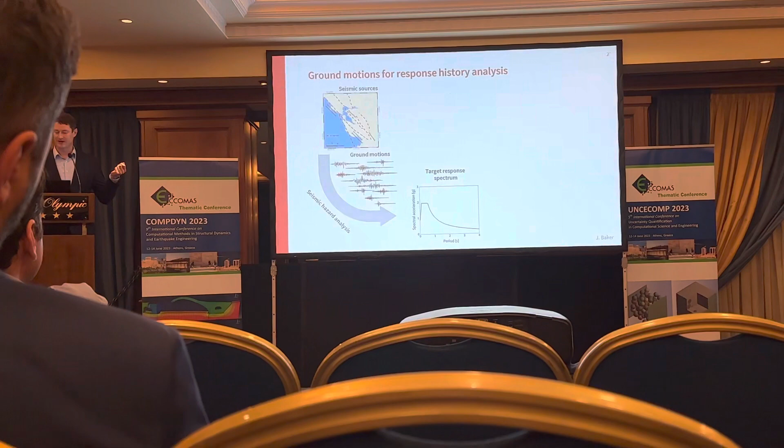So we start on the left-hand side here with a seismic hazard analysis. We need a characterization of nearby seismic sources and the potential sizes and locations of earthquakes that they could produce, described probabilistically. Then we make probabilistic predictions about the ground motions that could result at our site, given each of those potential earthquake ruptures. And we integrate that all up in a probabilistic seismic hazard analysis. And one of the outputs from that analysis is a response spectrum. And this is typically associated with some kind of rare level of ground shaking that we would predict at our site. And then that response spectrum is then utilized heading into our computational dynamics problem.

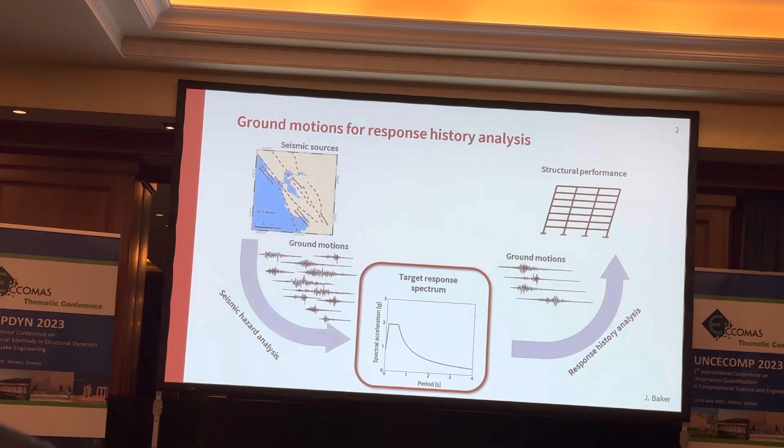We'll take that response spectrum, we'll find some ground motions that are compatible with that response spectrum, either recordings or simulations. Those are then inputs for numerical modeling of the structural performance. And here I'm thinking about detailed analysis, right? If we're doing all of this hazard analysis, it's probably a relatively involved project. And I'm thinking about the context where that structural performance is assessed with a nonlinear dynamics model. So we've got deterioration mechanisms and kind of some complex relationships between those input ground motions and the response of the structure.

Okay? And what I want to dig in today on is this middle piece here, this target response spectrum. So that's really an important link between what the earth scientists are doing to tell us about potential seismic hazards and what we as engineers are doing to infer the structural performance associated with that. And as I'll foreshadow a little bit, the way we specify that response spectrum can have really big impacts on the way that we make inferences about the performance of the structure.

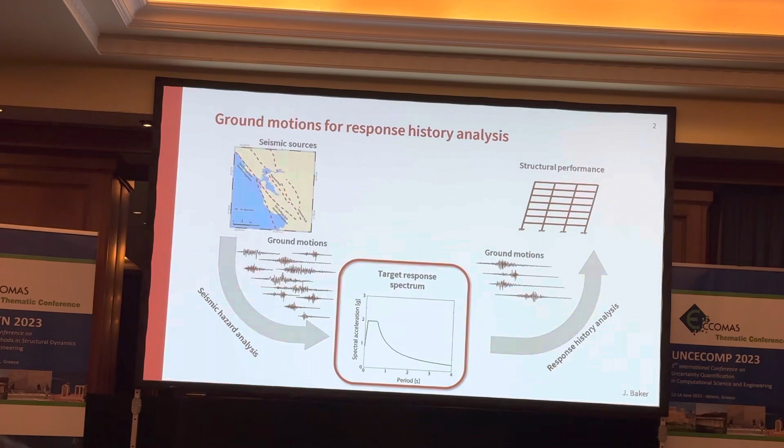Okay, so what I want to do then is I kind of have two parts to the presentation. For the first half or so of the presentation, I want to just give a little background or kind of broad explanation about characterizing response spectra. And I'm going to talk about the conditional mean spectrum in particular, and just give a little bit of explanation about what this concept is as a target response spectrum.

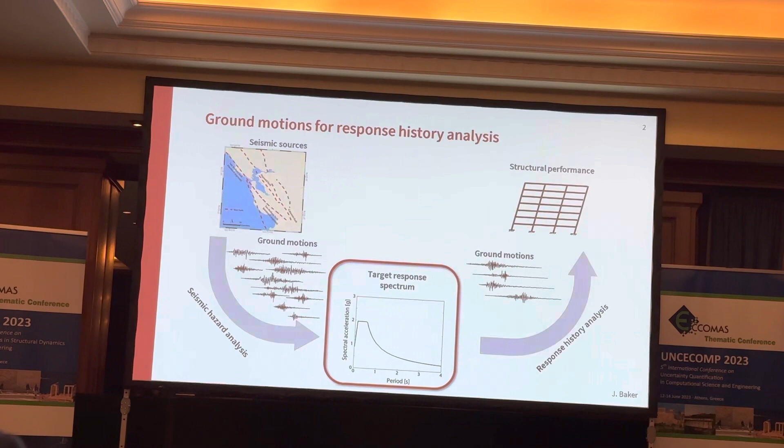And then in the second half of the presentation, I want to talk a bit about what can we do with those insights in terms of specifying response spectra in building codes and other regulations, and how do we kind of formalize this process so that it can be used in structural assessment. I'll talk a little bit about some of my experiences, as well as what the US building codes are doing now in this regard, and a little bit of study we've been doing recently to evaluate if the current code provisions are appropriate in terms of meeting the goals that we have out of this assessment procedure. Okay, so let's get started with that.

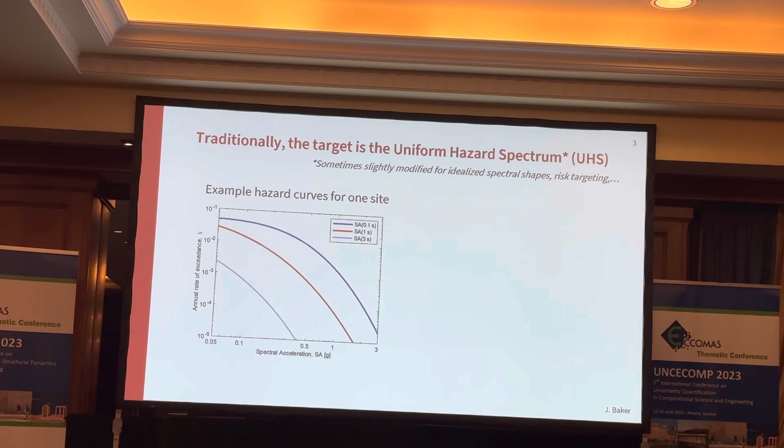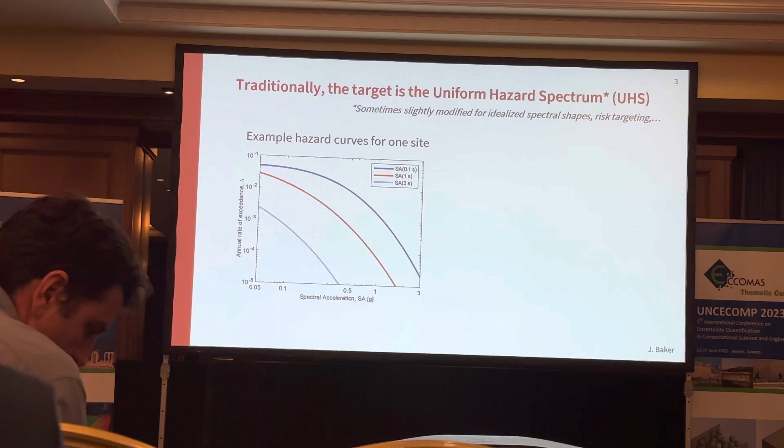So traditionally, that middle target response spectrum has been a uniform hazard spectrum, and I'll put a little asterisk there that sometimes we make some modifications. We've got an idealized code shape, like a multilinear shape. And some places we use these risk-targeted spectra that are a little bit of a modified uniform hazard spectrum. But I think conceptually, if we think about a uniform hazard spectrum, that's really pretty close to the basis for a lot of the response spectra that we use in, particularly in kind of the building assessment practice and building code context and things like that. And just to make sure we're all on the same page, this uniform hazard spectrum, what we do is we do that seismic hazard analysis I pointed to on the previous page.

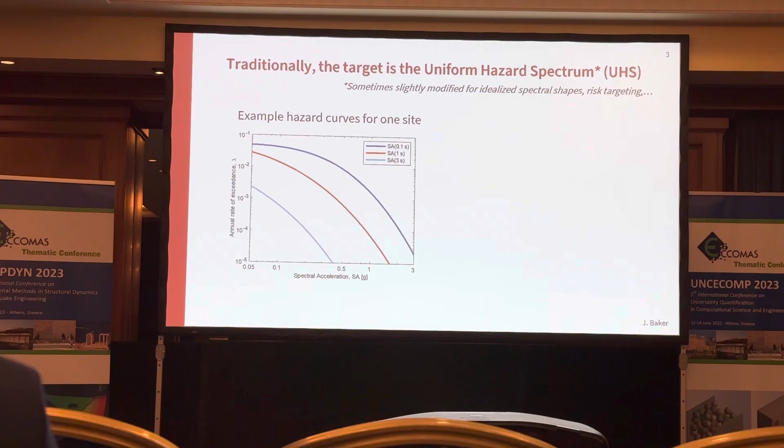And so what I've got here plotted are ground motion hazard curves for an example site. We've got three curves here, plotting spectral acceleration versus the annual rate of exceedance. Over on the left, we've got the low amplitude ground motions that are exceeded frequently with high rates. And as you move to the right, this is higher and higher amplitudes. The three curves are three metrics of ground motion intensity, ranging from short periods to longer periods. And so for each spectral acceleration period, we've got a different ground motion hazard curve.

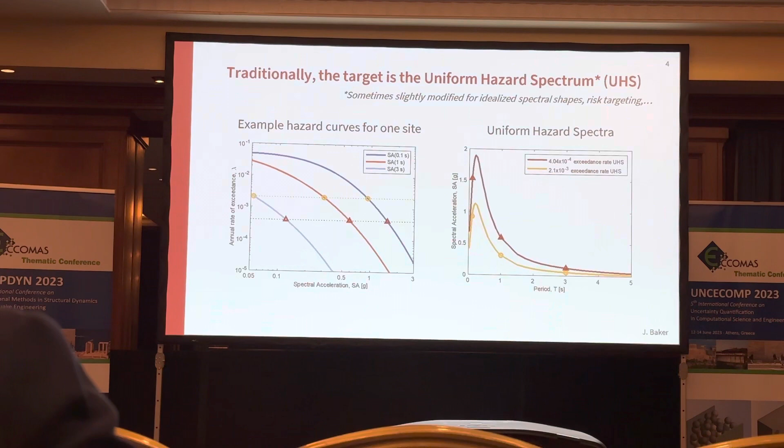And to build a uniform hazard spectrum, we just pick an annual exceedance rate off the vertical axis. We go pull the amplitudes of the spectral accelerations from those different curves. And then on the right-hand side, we just draw those points together. So we've got the spectral acceleration period plotted on the horizontal axis, and the spectral acceleration itself plotted on the vertical axis. So I've got it plotted there for 2 return periods.

And you can take the 3 points off the left plots, get some points from other periods, and fill it all in, right? And so sometimes we use the spectrum directly, sometimes we draw some lines through it and idealize it, and use that to represent the ground shaking hazard, okay? And so that's been a basis for many of our codes around the world and many of our different evaluation procedures.

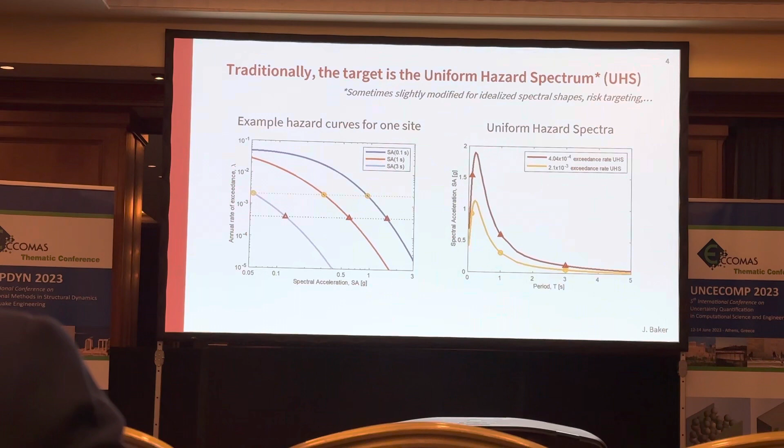The challenge here, though, is that response spectrum is not the response spectrum of any one ground motion, right? It's a collection of points from a collection of independent analyses, and we've plotted them all together because it's a very convenient way to summarize a lot of information. You know, each point on those uniform hazard spectra has the same rate of exceedance, so we've got some sort of equivalence from point to point, but it's not the spectrum of any one ground motion, right? It's just an aggregation of a lot of analyses. And so that'll be important here coming up.

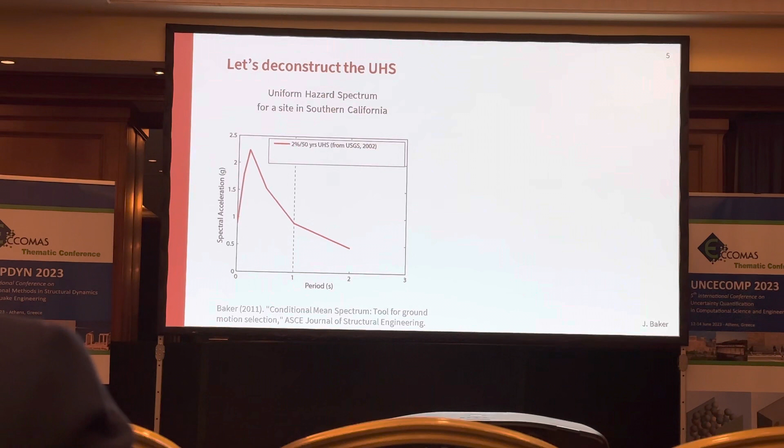So let's deconstruct that uniform hazard spectrum a little bit here. I've got a uniform hazard spectrum pulled for a site in Southern California near Los Angeles. So this is a highly seismically active part of the world, and a part of the world where I work a lot. So it's useful for illustrating a few points. So we can pull this uniform hazard spectrum. I took this from the US Geological Survey, which is the US agency that produces this data for most of our engineering work in the US.

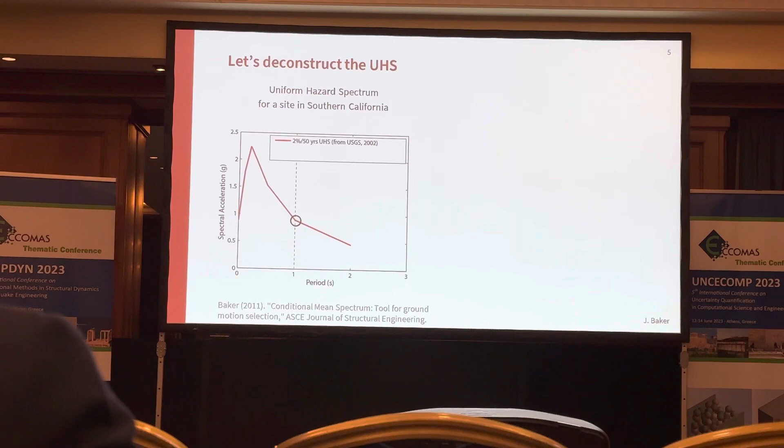And let's say that I was interested in a structure that has a period of 1 second. So I'm interested in ground motion amplitudes at about 1 second. And for this particular site, this is a 2% in 50 years probability of exceedance hazard curve, and the amplitude's about 0.9 G. So I might be interested in 0.9 G spectral accelerations at 1 second as a loading condition for my assessment. And we can do a ground motion disaggregation.

Some of you might know these things. If not, what it is, this is a conditional distribution of the earthquake sources that contributed to that 0.9 G spectral acceleration at 1 second. This is kind of a standard product out of hazard analyses. And so the horizontal axes here are magnitudes and distances of earthquakes, and then the heights of the bars are the percent contribution from those types of earthquakes to this ground motion at this particular site.

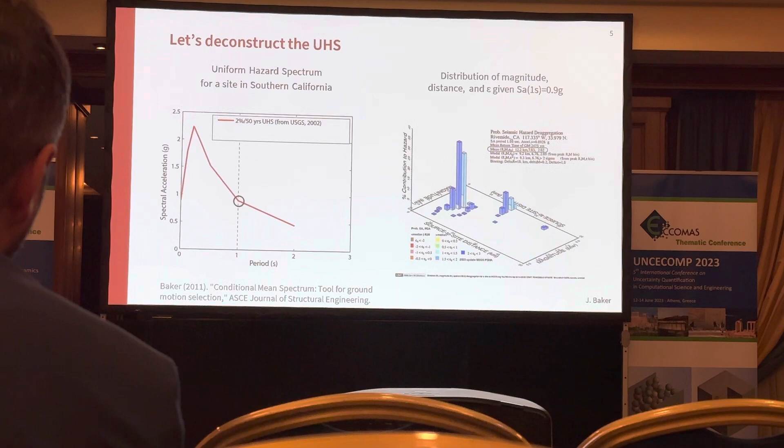So you see this big spike kind of off to the left of the figure, and those are magnitude 7 earthquakes about 10 kilometers away from the site. There's a big active source there, about 10 kilometers away, that produces earthquakes every 200 years or so, and so it's contributing a lot to hazard at this site. So magnitude 7, I think to be more precise, it's 12 kilometers away. So let's keep those numbers in mind because I'll use that for an example for the next few slides.

So if I take a magnitude 7 earthquake 12 kilometers away, we have these ground motion models that make predictions of ground motion amplitudes. If I just go predict the median amplitude from one of these models, I get this black line here, which is much lower than the uniform hazard spectrum. At that 1 second period, it's only about 0.3 G. So we've got this big gap between what a magnitude 7 earthquake 12 kilometers away produces on average and what this response spectrum is. And what's the extra ingredient here that closes that gap is what we term epsilon.

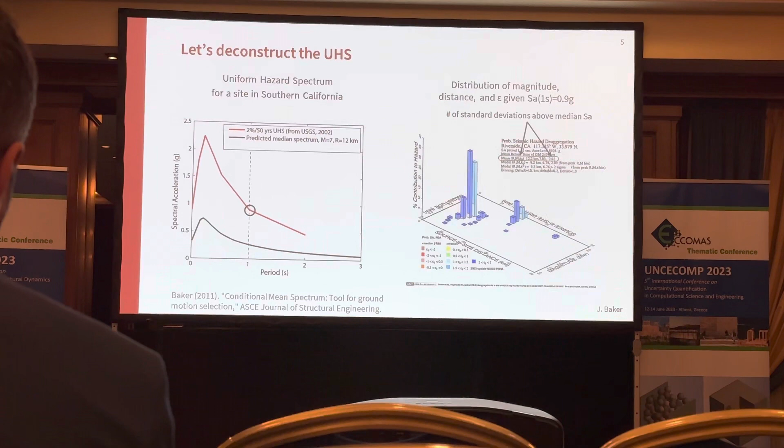So this is kind of the residual between a particular earthquake's ground motion intensity and its median prediction, right? So the ground motions are highly variable. Some are much bigger than the median, some are much smaller. And in this case, for this uniform hazard spectrum, the conditional epsilon is 2, saying we're expecting a 2 standard deviation larger than median ground motion. And indeed, if I plot a median plus 2 standard deviations prediction from a ground motion model, we're back to around that uniform hazard spectrum.

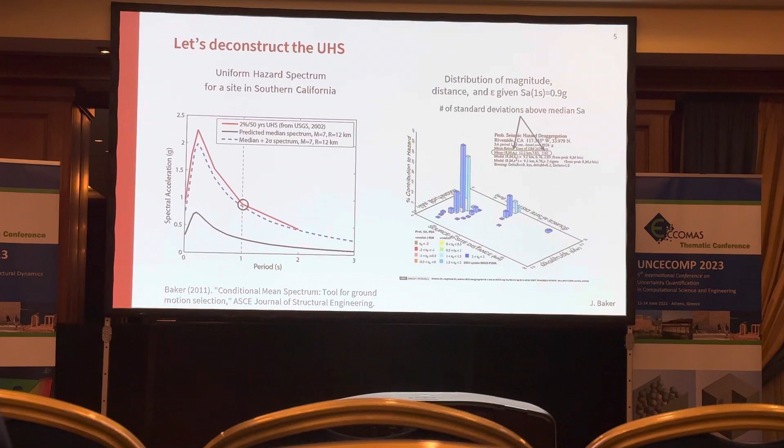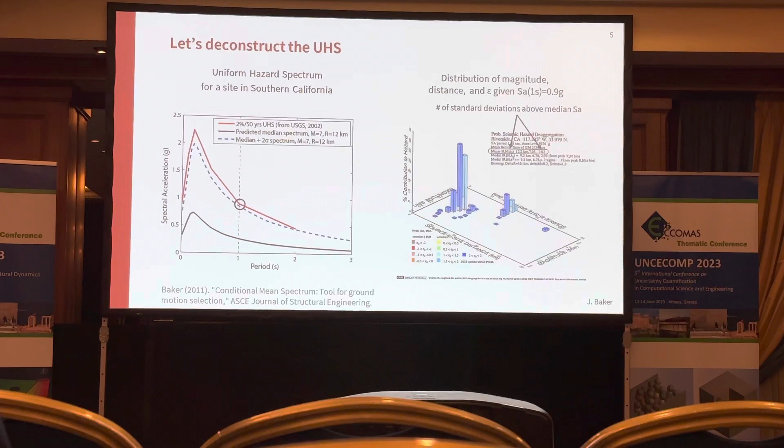So this is an important concept that in a lot of seismically active parts of the world, when we're designing for rare ground motions, like a 2% probability of exceedance in 50 years, that's something that occurs once every 2,475 years, 2,500 years. But I mentioned this earthquake source produces magnitude 7 earthquakes every 200 years. So there's this discrepancy between this 2,500 year return period that I'm targeting and the return period of the earthquake, which means that I'm usually designing for stronger than median ground motions in those conditions. And so this big difference between median amplitudes and these design amplitudes is appropriate because I'm trying to design for this rare condition, and so that's naturally associated with a stronger than average ground motion amplitude.

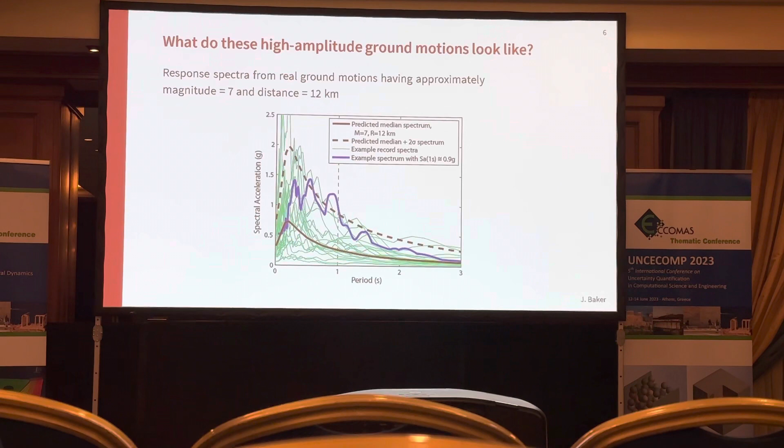Okay, let's look at some real ground motions. So here I've got the median spectrum in black here, the median plus 2 standard deviation spectrum in dashed black, so the same lines as the previous slide. And then in green are plotted the response spectra of real recorded ground motions that had about a magnitude 7 and were recorded about 12 kilometers from the site. So just collect up observational data, and they're relatively consistent with the predictive model, which is natural because the predictive model is based on observations. So about half the ground motions are above the median spectrum, about half are below. And on occasion, we make ground motions with these response spectra way up 2 standard deviations up, right? So there's, I think, 20 ground motions plotted there. So we would expect about 1 out of 20 to be 2 standard deviations larger than the median, and indeed we see that. And in fact, in blue, I've got 1 ground motion highlighted.

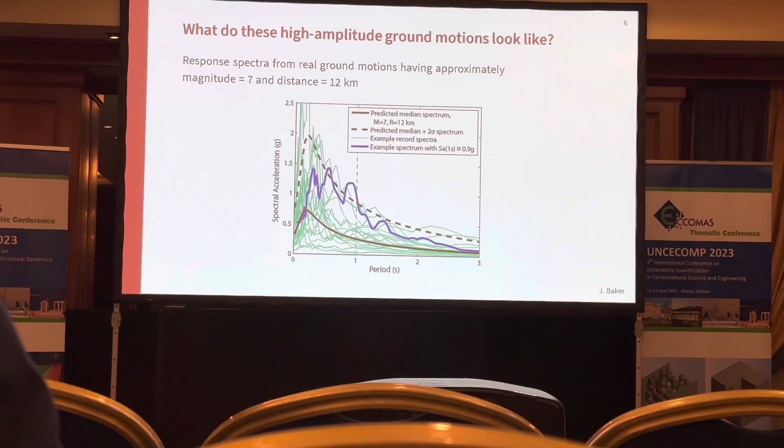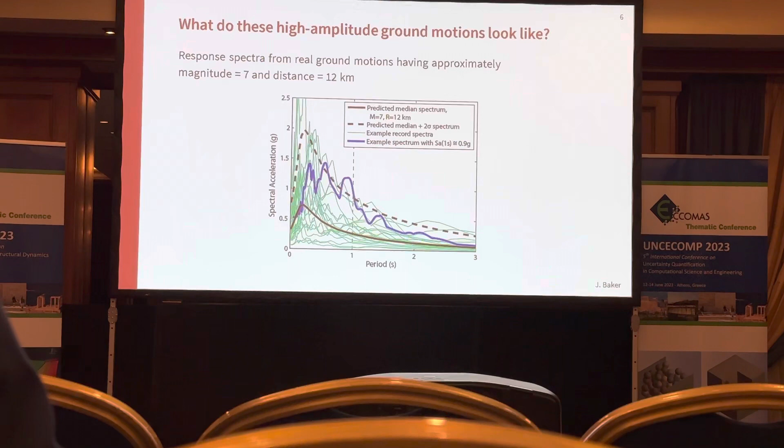So this is the response spectrum of our magic ground motion that we want, right? This was a ground motion from a magnitude 7 earthquake, about 12 kilometers away from the rupture, and it has a 0.9 G amplitude at 1 second, which was that condition that I started with, right? And so it's strong enough at 1 second to be matching this design spectrum. But at other periods, it's not necessarily up at 2 standard deviations, right? So these residuals in the amplitudes are not perfectly correlated from period to period. So if you look out at 2 or 3 seconds in this response spectrum, that blue spectrum is much lower than the 2 standard deviations. And similarly, over at shorter periods, it's much lower, right? And so back to my point that the uniform hazard spectrum, which is kind of like this black dashed line, that's not the spectrum of any one ground motion. And we see from these green motions that some ground motions are up at that high amplitude, but they're not up at that high amplitude at all periods in any one ground motion. And so I want to think about how we could recognize that in our design procedures.

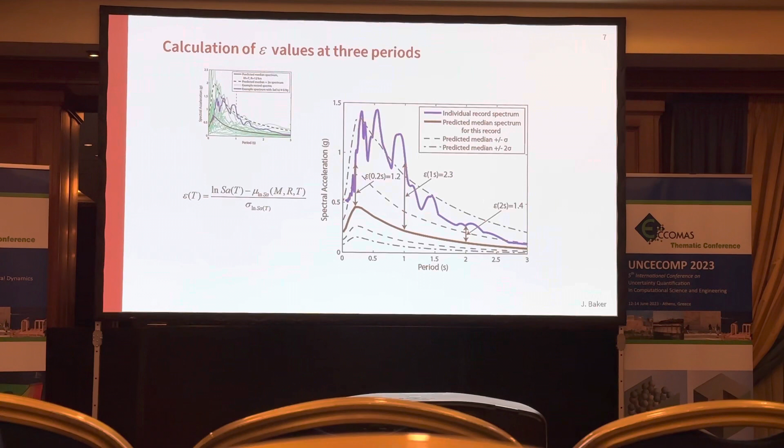So what we do is we can think about these epsilons, these residuals between the median prediction and what we actually observed. And so that's computed. There's a formula here, I won't dwell on it, other than to say it's just the difference between observations and median predictions in terms of number of standard deviations. And these amplitudes are log-normally distributed, so we do everything in log space. We just take logarithms, and then the response spectrum is effectively like a Gaussian process. So we can do nice statistics on that. But I'll plot things in linear scale just for interpretability. So we can compute these epsilons for this particular ground motion relative to its prediction model. So at the period of 1 second, this ground motion had an epsilon of 2.3, not exactly the 2 that I wanted, but close enough for illustration. And you can compute those epsilons at other periods as well, out at a longer period and a shorter period. So this is 1 ground motion. If we do these same epsilon calculations for several hundred ground motions, I'll plot those here.

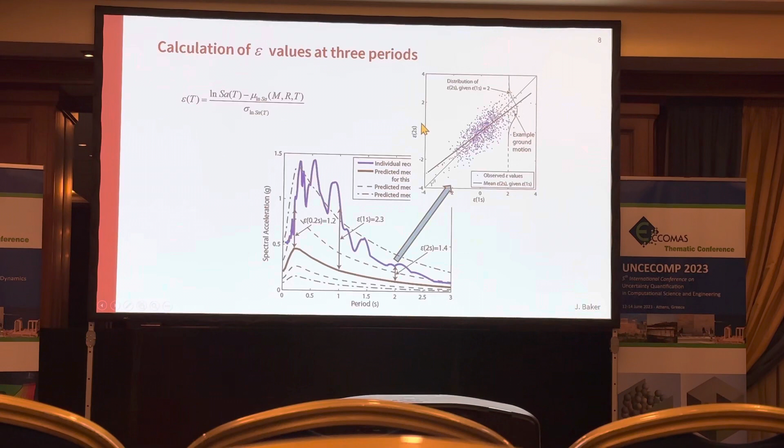So this scatter plot up on the right is a plot of epsilons at 1 second versus epsilons at 2 seconds. And so our particular ground motion we're looking at is out here at 2.3 for epsilon at 1 second and 1.4 for epsilon at 2 seconds. We've got lots of other points, some of them are positive and some of them are negative. And so you can see the scatter plot there.

And so that means we get nice formulas like, given an epsilon at 1 second of 2, the mean epsilon at 2 seconds is going to just be the correlation between these epsilons, which is 0.75 in this case, times the conditioning epsilon at 1 second. And you can get a conditional standard deviation as well. This is just multivariate normal formulas.

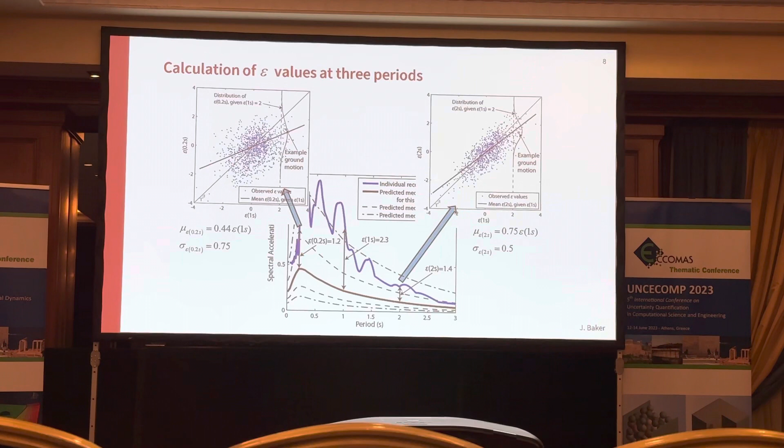Over at 0.2 seconds, the correlation between the 1 second and 0.2 second residuals is smaller. It's only 0.44. So the conditional mean is smaller in that case, and the conditional standard deviation is a bit bigger. All right, so we can repeat that calculation over all pairs of periods, and then we can fill in what we call the conditional mean spectrum.

So we're going to take that magnitude 7, 12 kilometer condition that we started with from our hazard analysis. We're also going to take the epsilon at 1 second of 2 that got us to that 0.9 g amplitude that came out of our initial hazard analysis. But then at all the other periods, rather than draw together this uniform hazard spectrum, we'll take the conditional mean values of the epsilons at those periods.

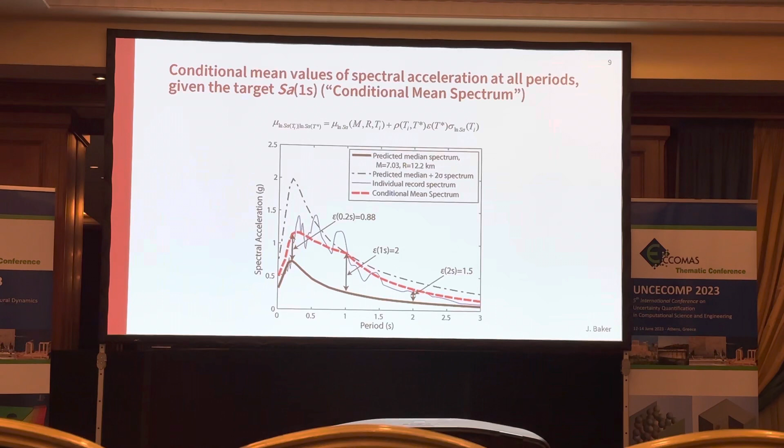So out at 2 seconds, we saw that the conditional mean epsilon was 0.75 times the conditioning epsilon, so 1.5, and over at 0.2 seconds, we've got a smaller number. So you can draw those points in over all these other periods, and that's this dashed red line. And we call it the conditional mean spectrum because we've conditioned on that spectral acceleration amplitude at a conditioning period, conditioned on the rupture characteristics that drove that, and we fill in the conditional mean at the other periods.

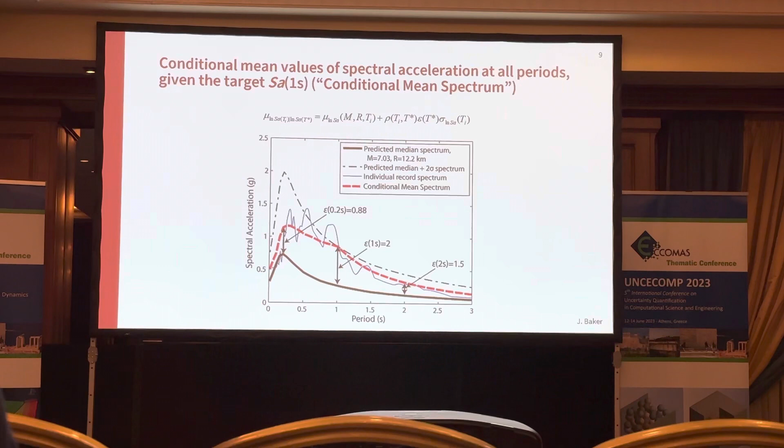And this is now plausibly observable in a single ground motion because we've carried these statistics through. And just anecdotally, that blue response spectrum is still sitting there, and you can see it kind of tracks next to that conditional mean value, giving us some sort of ad hoc observation that we see some consistency here.

We can also draw conditional standard deviations at these other periods. So we have no uncertainty at the 1 second spectral acceleration because we conditioned on that value. At the other periods, I've got plus or minus 1 standard deviation bounds drawn, to reflect the uncertainty at these other periods we didn't condition on. And that just comes out of those multivariate normal statistics that I showed earlier.

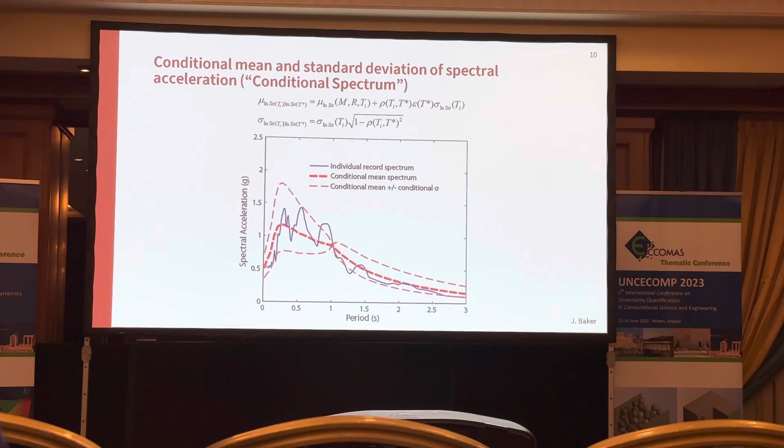All right, and we can call that a conditional spectrum. It doesn't have just a mean value anymore. You can represent a full distribution. Okay, so with these targets, you can go then select ground motions. So we'll build that target spectrum, and then go find ground motions consistent with that target spectrum, either the mean or the full distribution. And that'll represent realistic loading conditions for your site.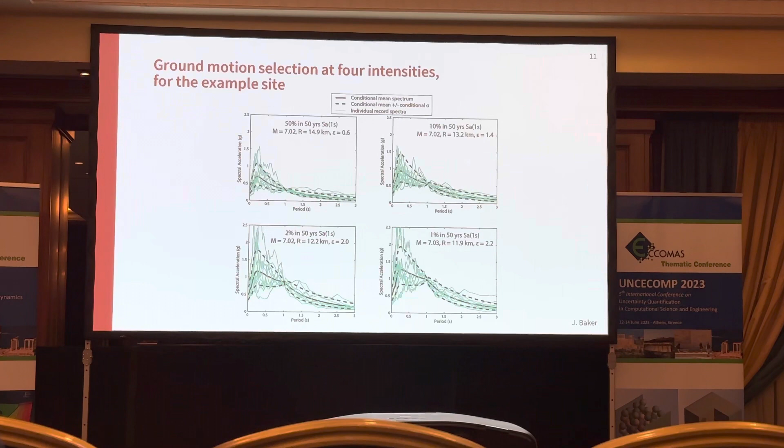And so the shape of the spectrum varies with amplitude. The shape of the spectrum is also going to vary from location to location, representing differences in the seismic characteristics at the location of interest. So we have this site-specific, amplitude-specific ground motion selection. But if we really want to, we can carry through all these. Actually, let me say one more thing before I get to that thought.

So there's a little bit of extra work and a little bit of extra thought to think through this, but it makes a big difference in terms of our assessments. So here's just a taste of what we might see.

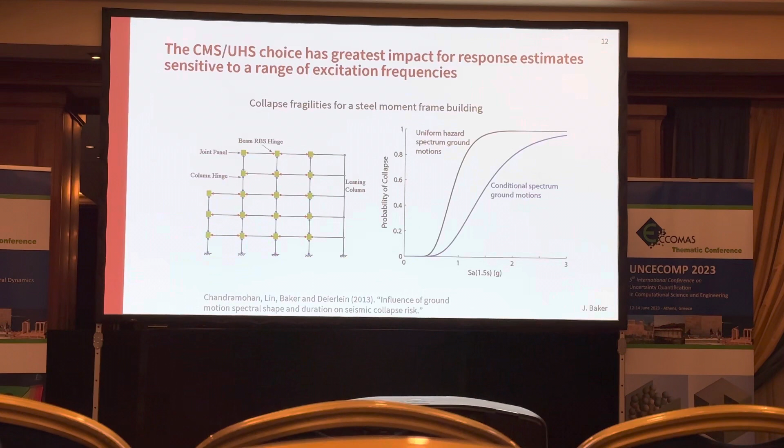So this is a steel frame building that we analyzed for another project with some colleagues. And this is a nonlinear dynamic model. We've got these lumped plasticity beam column connections that have all sorts of cyclic and within cycle deterioration, negative stiffness representing kind of buckling in the connections and all of this. And we model this building using ground motions like the previous slide, all the way out to collapse.

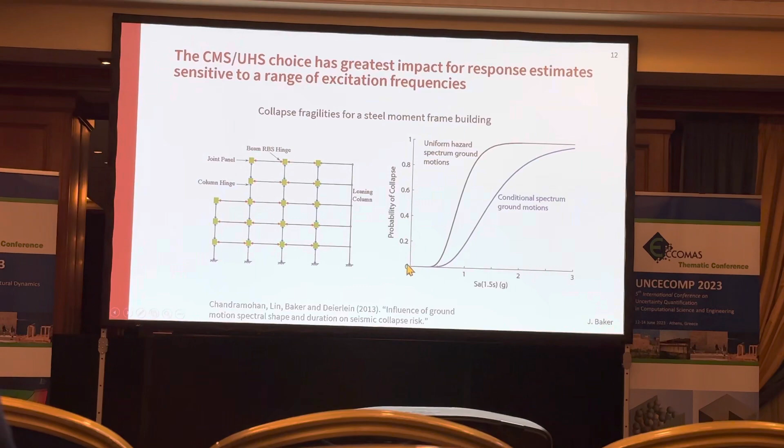So this is a plot over on the right of ground motion amplitudes at 1.5 second spectral accelerations versus probabilities of collapse that we get out of the repeated analyses. We did the whole process once with uniform hazard spectrum ground motions, and that's shown in black, and then once with conditional spectrum ground motions, like from the previous slide, shown in blue.

And maybe to give you a little bit of intuition, if I back up, we're effectively using the red spectrum or the dashed black spectrum as our 2 spectral targets for the ground motion selection. And because this is a building we're modeling all the way out to collapse, we need to get to kind of high amplitudes at elastic modal periods in order to really get the building excited. But then as it's deteriorating and softening and losing stiffness, its effective period is shifting out to much longer periods. And at these longer periods, there's a big difference in the amplitudes between the uniform hazard spectrum motions, which are not really the spectrum of any one motion, versus the conditional mean spectrum motions, which more realistically represent what we can see in one ground motion.

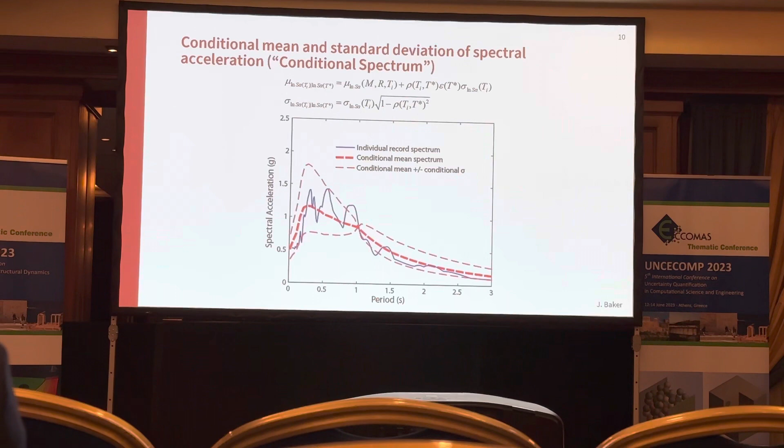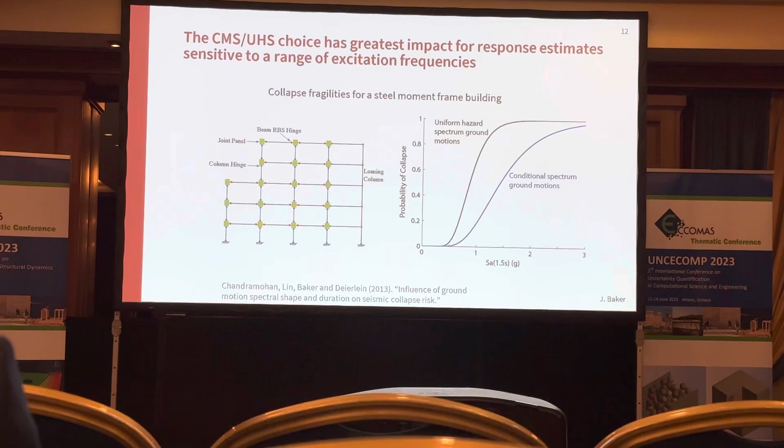And so because of that difference in amplitude, we see lower probabilities of collapse from the conditional spectrum ground motions, which we think are more accurate. And just to pick a point on this curve and try to bring it home, at a 1G spectral acceleration, the conditional spectrum predicts a 0.2 probability of collapse, and the uniform hazard spectrum ground motions predict a 0.8 probability of collapse. So really a massive difference, and that's as big of a difference as we ever see from modeling uncertainty in the buildings. You can really change building characteristics pretty substantially and not see differences this big. So the choice of loading is really important in these types of problems if we're trying to get at collapse reliability.

Okay, so this is kind of a full research style, do lots of ground motion selection, step through lots of different amplitudes. That's really not what happens in design practice, right? This is too resource intensive and too many analyses and too many ground motions to select. And so the other piece of this puzzle that we're thinking about is how to codify this and how to use this in a more simplified manner.

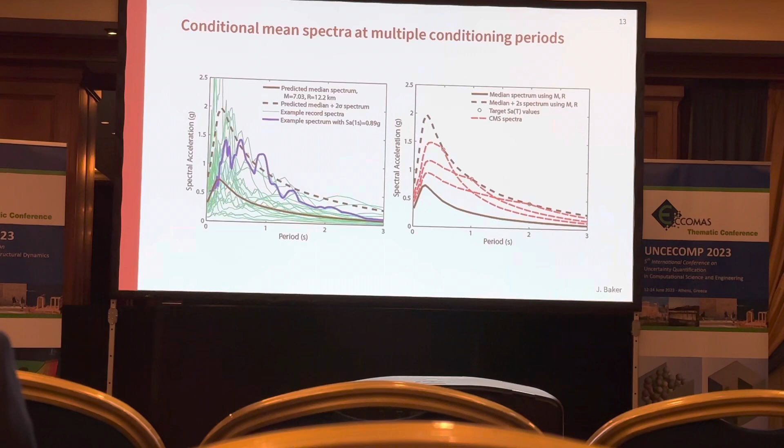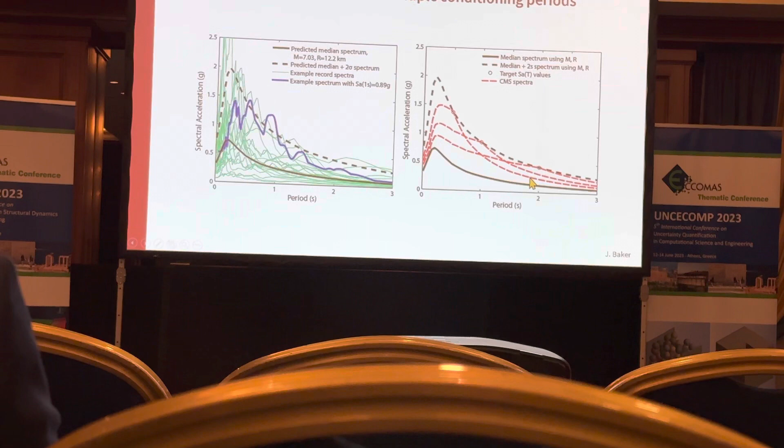And what's important there is usually in a code check, we're checking at 1 return period, 1 ground motion amplitude, and checking was our performance satisfactory or not, right? And so you might think about this, maybe coming over to the right figure, if this dashed black line was our uniform hazard spectrum, and we were trying to break it up into this conditional mean spectrum, the choice of the conditioning period is important here, right? So I might condition at an elastic modal period of my structure, but if the building softens through the analysis, I've got kind of lower intensity that I've loaded it with, but perhaps I want to condition out at the softened period and get the high amplitudes there and have lower amplitudes at shorter periods. So those are all plausible loading conditions.

And so the question is how to handle those multiple loading conditions, which I think is equivalent to having multiple conditioning periods. How do we handle that in a checking procedure when we don't know ahead of time what exactly the periods are that are critical for loading the structure, right? We're trying to explore that through the assessment. So one way to think about this conditional spectrum calculation and these conditioning periods, sorry, I fished around my slides a little bit this morning.

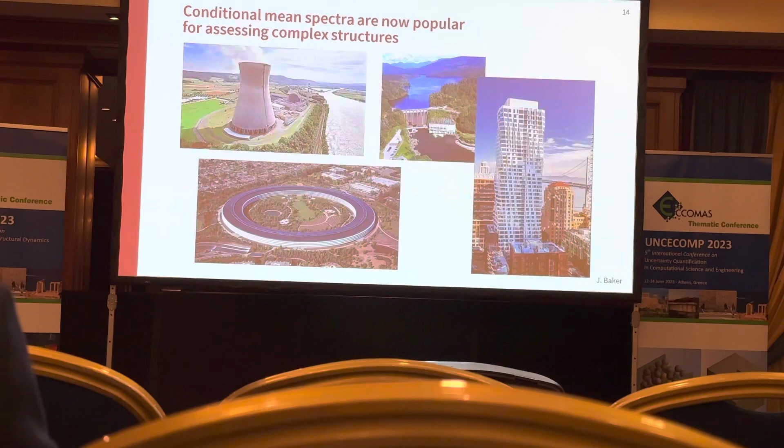And then high-rise buildings is really a popular case. Most of the high-rise buildings built in the western United States now use this conditional mean spectrum procedure because you get very low frequency modes for the first mode of the building, but then you have other types of response features that are sensitive to higher frequency excitation. So I'll think about the high-rise building case in particular, because that's a really common situation in the western US and other parts of the world. I know it's used as well.

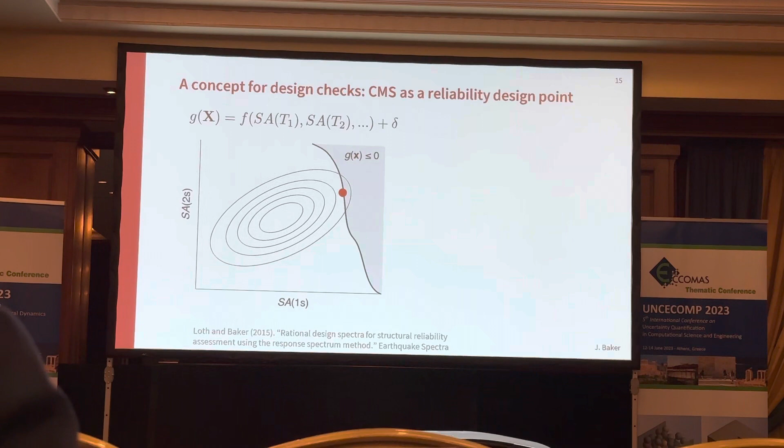And so this idea of these conditioning periods, one way to think about it is to think about a reliability analysis with a design point, right? And so the full-blown approach, selecting ground motions at multiple intensities and stepping through these fragility functions, I think about as sampling ground motions across an entire probability distribution of spectral accelerations at different periods. I'll plot in just 2 dimensions here, but it's a higher dimensional problem. And our structure is some sort of function of these spectral accelerations, plus a function of other characteristics that are not defined by spectral acceleration. Let's call that delta here in a limit state function.

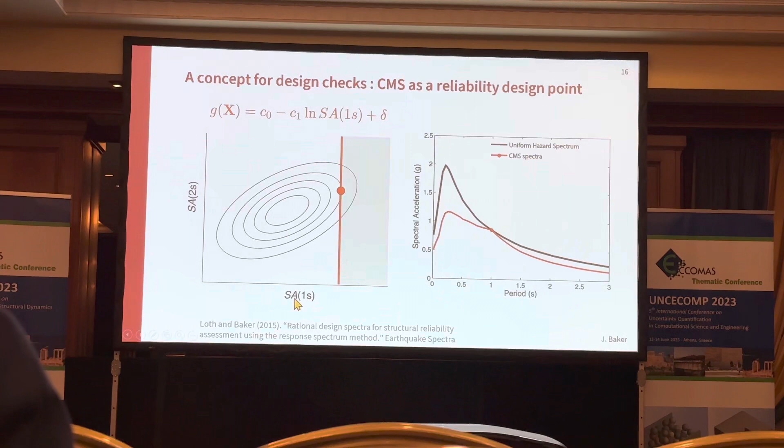Okay? And if we could step through this entire probability distribution with ground motions and check for failures and non-failures, we could find the probability of failure of the system and decide if that's acceptable. But in a checking procedure, we don't have the luxury of stepping through everywhere. So what we do is we just check at more simplified sets of loading conditions. One way to think about this is if this limit state function was really dominantly a function of one spectral acceleration period, then our limit state function would be vertical as a function of that one spectral acceleration period. Our design point would be the spectral acceleration with some probability of exceedance associated with our reliability goal. And then there's an adjustment to deal with this delta.

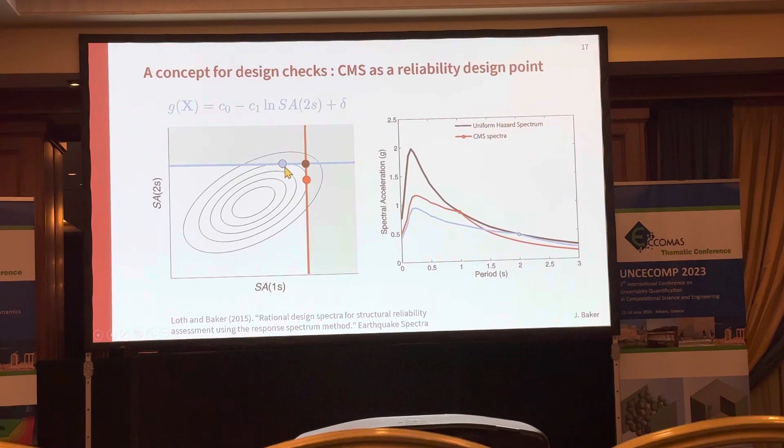So the spectral acceleration at 1 second, you could derive it through some reliability calculations. The spectral acceleration at 2 seconds, because it's not in the limit state function, the design point is going to be at the conditional mean value of 2 second spectral accelerations given this 1 second value. So that naturally falls out into a conditional mean spectrum at this 1 second condition. We don't know if that's actually the limit state function for our structure. Maybe our structure is a function of spectral acceleration at 2 seconds. And so we'd get a target 2 second spectral acceleration plus a conditional mean value at 1 second, and similarly for the other dimensions not plotted here.

And so you could think about these conditional mean spectra at different conditioning periods as design points. And then what we can do is we can do our check of our structure at those design points. And if we have adequate performance at those design points, we can infer that the limit state function is somewhere further out to the right and above. And we can infer that we've got acceptably low probabilities of failure. So those would be natural points to check at.

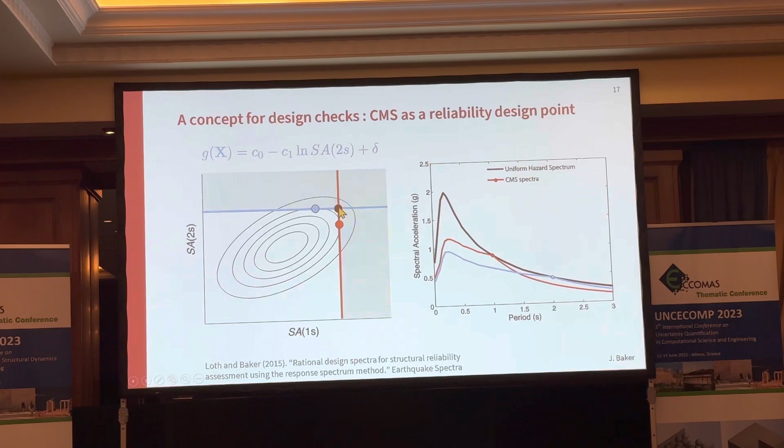The uniform hazard spectrum is represented by this black point, where we take marginal distributions of our individual spectral accelerations. We find some point out of those probability distributions, and then we just connect them together. But that's not necessarily an optimal place to be checking, especially in higher dimensions. You can really put that point out pretty far away from your probability distribution. So for those of you reliability oriented, that might be a concept that resonates here. We did some derivations to try to draw that connection a few years ago.

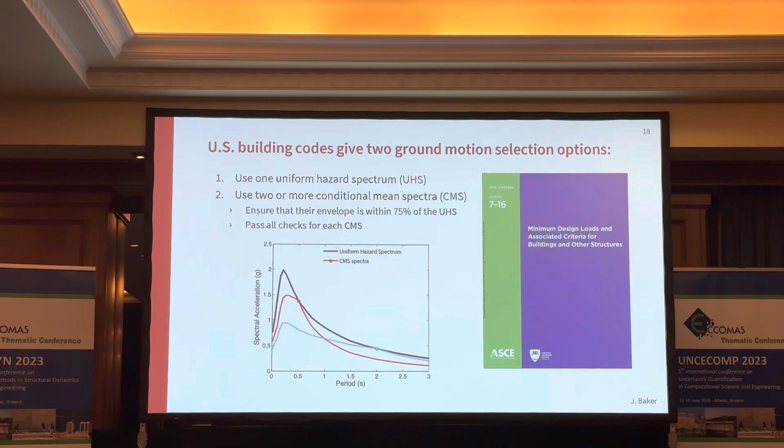Okay, so now to building codes, the second part of the talk. Thinking about those high-rise buildings in particular, we have a set of codes and standards that governs those designs. In the US, ASCE 7 is the standard that specifies seismic loading conditions used in most of the design of new buildings. And since 2016, it's allowed 2 different options for your ground motion selection.

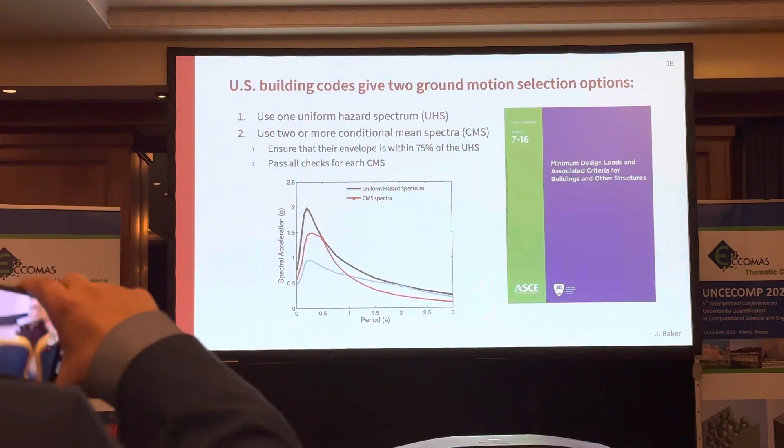So you still do hazard analysis as usual. You can choose to use a uniform hazard spectrum, or uniform hazard spectrum with an asterisk for some other modifiers that are not important for today. And that's the traditional approach that's been in the standards for decades. But now you can also use conditional mean spectrum. And the way that it was codified, the goal is to allow this procedure to be used, but allow it to be relatively robust so it's not misused.

Some of the key concepts in there are that you have to use 2 or more conditional spectra. That's representing these different loading conditions that might be important for your structure. And there's some period range of this response spectra that you're responsible for considering. And within that period range, the envelope of these conditional mean spectra has to be within 75% of the UHS, right? So the worry here is that, in this situation, if I had a conditional period of 0.5 seconds and a conditional period of 2 seconds, at 1 second here, those 2 spectra, neither one of them is very high in amplitude compared to this uniform hazard spectrum.

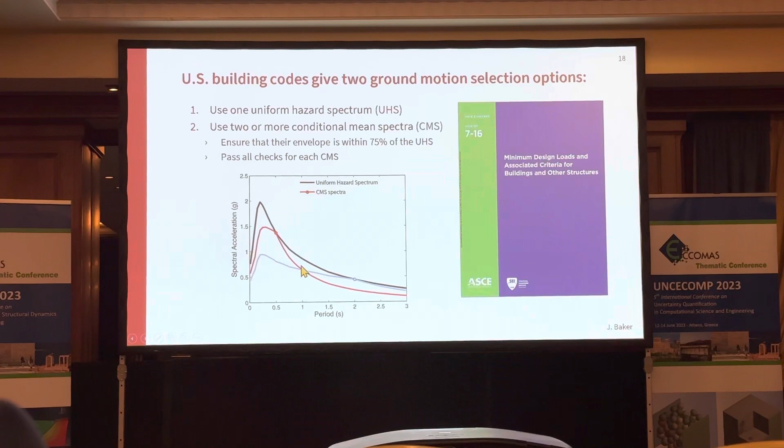But I know I could get a high amplitude ground motion at 1 second, and I don't want to have a gap there, but I never loaded the structure to see if that would be problematic. So the rule is that at all periods, you have to be within 75% of the uniform hazard spectrum. And if you have one of these gaps, you have to either fatten out your conditional mean spectra to make them a little more intense, or you have to add some more conditional mean spectra in those gaps to make sure there's no periods where you're not putting in a high amplitude load. In practice, almost everybody fattens out the conditional mean spectra, so you add in a little bit of conservatism, but you don't do more work.

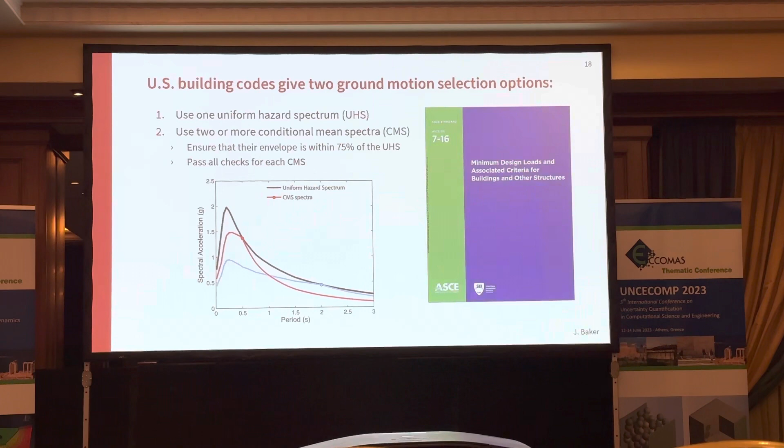The trick is that for each response spectrum, you have to do a separate set of ground motion selection, a separate set of structural analyses, and you have to pass all the design checks in terms of drifts and forces and all these things for each CMS. So each time you add a new target spectrum, you're adding more work. So this option 2 is twice as much work in terms of analysis, but adding a 3rd spectrum is really pretty unappealing to most people. They'd rather split the difference, do two sets of analyses, and be a little bit more conservative.

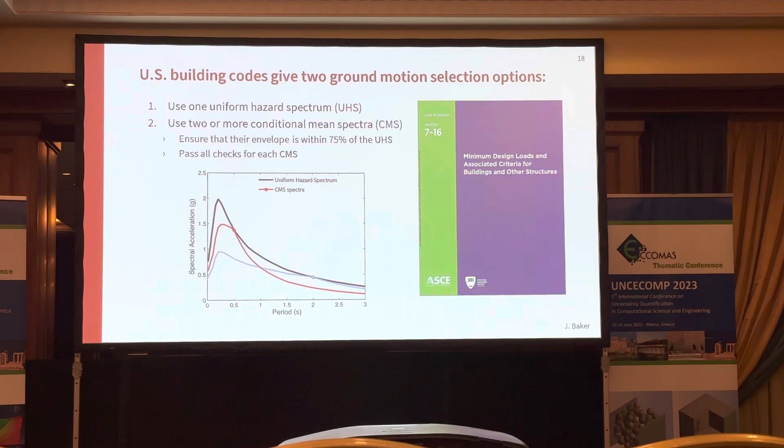And so that was built out of some experience and some judgment, but we've more recently been trying to test this out a little bit more systematically to make sure that we're not missing anything with this type of procedure. So I want to talk to you a little bit about that. What we were doing is trying to assess that code procedure and check, is there any way we could break it or get unsatisfactory designs that happen to pass these checks, which is our big concern.

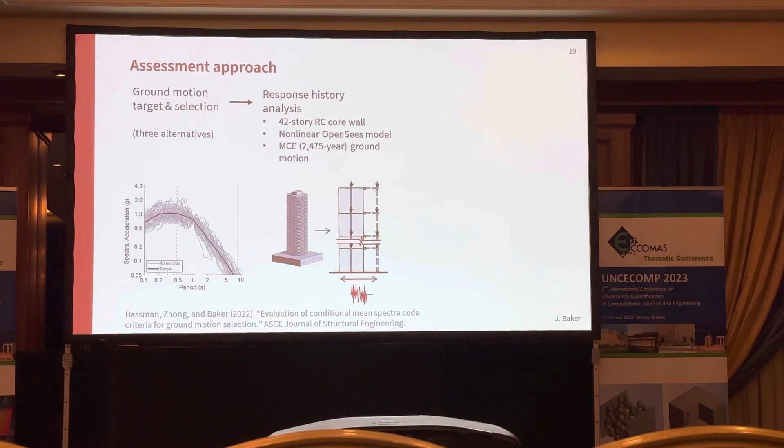So the way we did this assessment is we built these ground motion targets and did ground motion selection, and we've got 3 alternatives here. I'm going to talk about one based on the uniform hazard spectrum, the traditional way of doing this, as well as 2 conditional mean spectrum methods. For each set of ground motion selection, we then do dynamic analysis. And here we were using a 42-story reinforced concrete core wall. This is a pretty popular type of building in the Western US right now for condominiums and things like that. That white building that I showed in the photo is this type of structural system. It's about 40 stories tall. And we've got a nonlinear OpenSees model that has the key failure mechanisms that we're worried about in there.

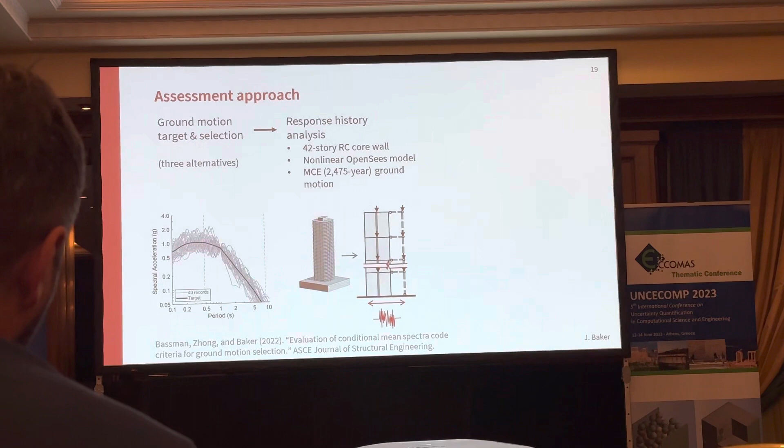And we're looking at maximum considered earthquake ground motions, so 2475-year return periods, so pretty high amplitude ground motions to do these checks at. So with each set of ground motions, we're going to do some checks, see how the building does, and then we're going to look at building demands. What we did here is we looked at story drift ratios, so the maximum throughout the building height, story shears, and floor accelerations.

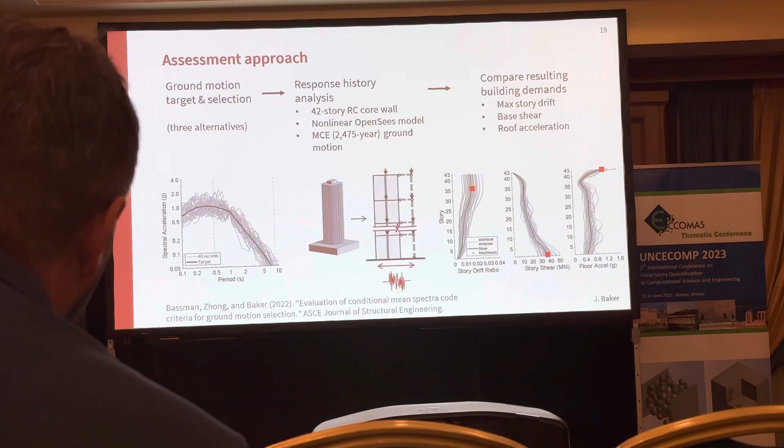And the idea was to pick a few different response parameters that are sensitive to different types of loading. So the story drift ratios are pretty first mode dominant in these buildings. And so the long period loading is important for driving story drift ratios, whereas the floor accelerations are much more sensitive to high frequency excitation. And so we could potentially miss one or the other of those parameters if we don't consider careful conditioning.

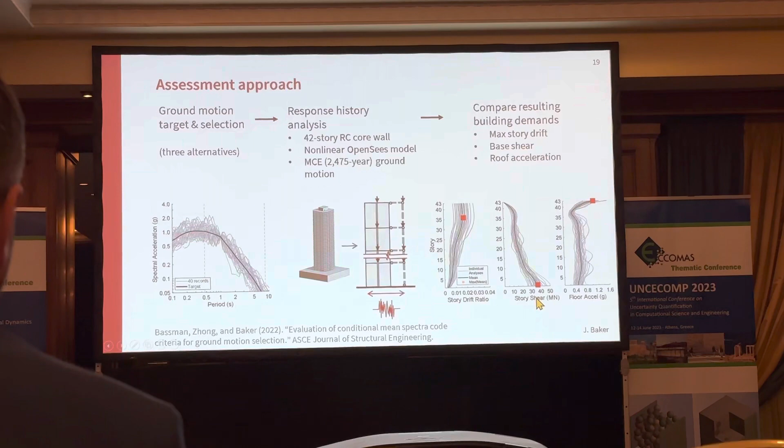Anecdotally, I'll say as well, if it's of interest for some of you, the story shears are a pretty important design parameter because that influences how much concrete and steel is in the base of these core walls. And when people use this conditional mean spectrum assessment approach instead of the traditional uniform hazard spectrum assessment approach, rule of thumb is you might reduce story shears by about 10%. And so that's a pretty big deal for new design. And for many analysts, it's worth the effort to do a careful analysis if you can justify reducing the design story shears, just as one metric.

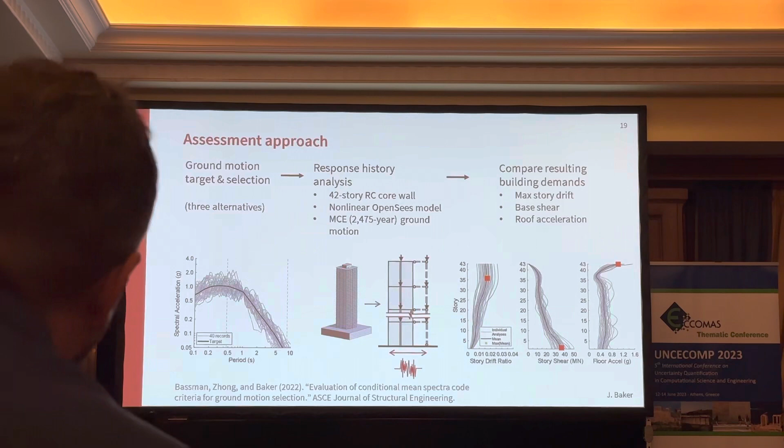Okay. So we looked at all those. In each case, we've got a suite of ground motions that we're running. And so we've got a suite of responses. These gray lines in the lower right are indicating individual response results. And the building code is having us look at the mean of that suite of responses. So we're just going to take the mean as a summary metric here. That's the number we would be checking against acceptance criteria in the building design.

Okay, so I mentioned there's 2 conditional mean spectrum selection methods. So let me tell you about those. One of them, we'll call it CMS ASCE. So this is compliant with that ASCE 7 standard I mentioned. So we'll do 2 target spectra, and we're going to broaden those spectra out until they hit this 75% threshold that's required. So there's a little picture over here on the right.

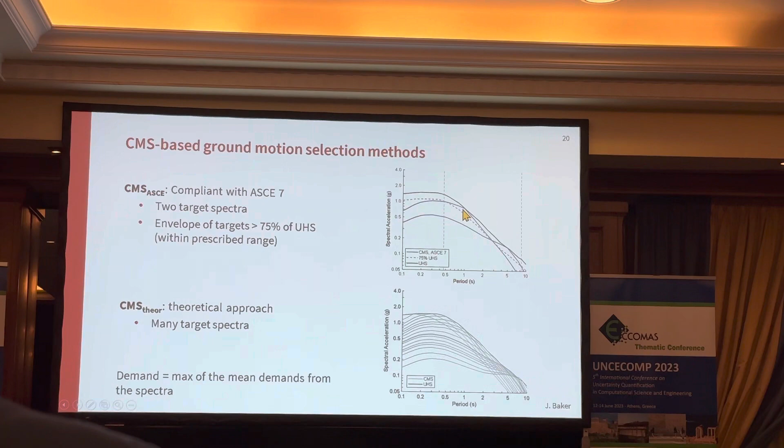The uniform hazard spectrum is shown in black. In this case, we've got 2 conditioning periods. You can see them as the peaks of these spectra where they touch the uniform hazard spectrum. The dashed line is the 75% threshold we have to hit, and the spectra wouldn't naturally hit that, but we broadened them out a little bit to make sure we got above that everywhere. We just touched it in a couple places.

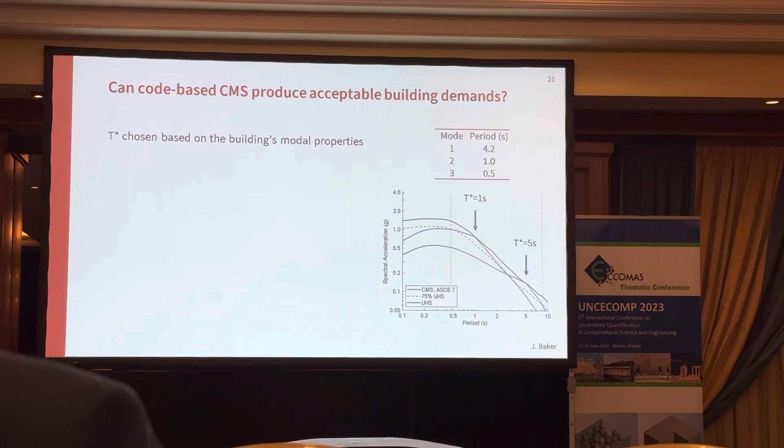The other thing I'll note, because it'll be important in a minute, is these dashed vertical lines. This is the period range that the code makes us consider, and whether we do uniform hazard spectrum or conditional mean spectrum, we've got to look at some period range, and this is double the first mode period to consider nonlinear softening, and down to higher mode periods on the left-hand side to consider higher mode responses. So for this 42-story building, we've got to go from a half second out to about 10 seconds. Sorry, I'm touching the computer. So that's a set of 2 spectra and 2 ground motion suites that would comply with ASCE 7.

Then we called the second approach the theoretical approach. In this case, we actually took 17 conditioning periods, and we said, well, we don't know ahead of time which conditioning period is going to be important. So let's just do them all. We'll do 17 sets of ground motion selection, and among those 17 sets of responses, we'll take the biggest one as the response that we're going to check against our acceptance criteria.

So the design engineers thought we were crazy for doing this, but we had time as researchers to run these things. And so we ran a whole bunch just to try to get a benchmark of what would happen if we hadn't simplified things down. You'll notice with these spectra, some of them dipped very low at periods away from their conditioning period, but we're not worried about that because we have other conditional spectra that hit the high loading amplitudes at those periods. Okay. And in either case, either the 2 spectra or the 17 spectra, we're going to take the maximum of the mean response we got out of any of those analyses targets as our response.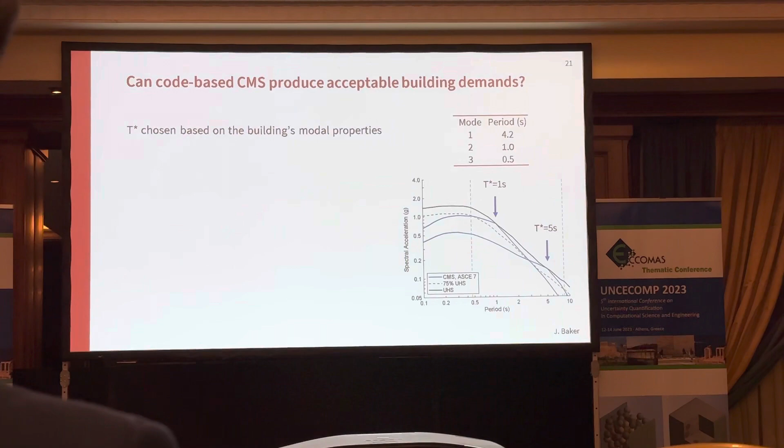So let's check this out. The first set of analyses we did is pretty close to what building designers would do in the Western US. We're going to use our conditioning periods, and we're going to choose them based on the building's modal properties. So this 42-story building I told you about, the first mode period is 4.2 seconds. Second mode period is 1 second, and the third mode period is a half second. So that's down at kind of the lower end of the period range you have to think about.

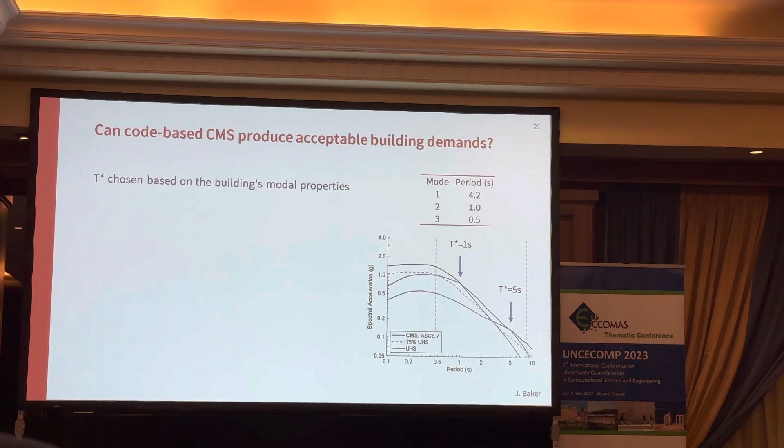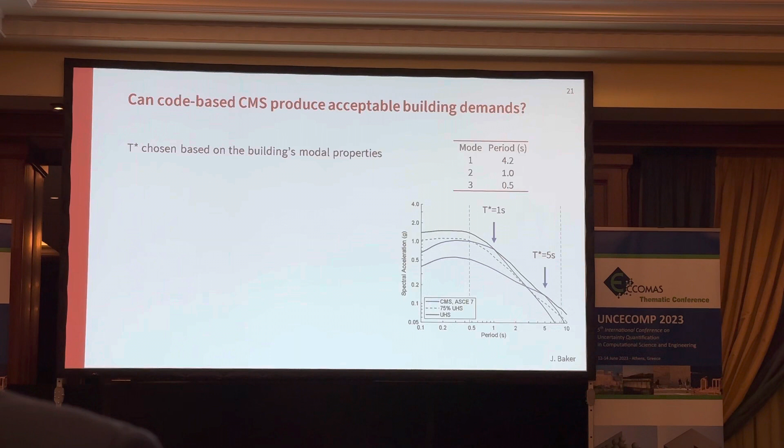So typical practice is to set one conditioning period slightly lengthened from the first mode period, like 20% longer. These core wall buildings tend to soften slightly, even if they're code compliant, at these very large ground shaking amplitudes. So we'll go out to 5 seconds there. And then the second conditioning period will typically take it to the second mode period. And if there's 3D modes, they tend to group in still kind of two discrete ranges. So the same thing happens for a 3D analysis, even though this is just a 2D analysis here today. Okay? So that's a typical conditioning period selection in practice.

And so here's a table of results. We've got the story drifts, the base shears, and the roof accelerations labeled down our rows. With the uniform hazard spectrum, we get a 2.6% drift. Right? This is very strong shaking, so a pretty decent amount of drift out of the building. The base shear is about 20% of the weight of the building, and the acceleration at the roof, which is where the peak accelerations were always showing up, was 1.3 g.

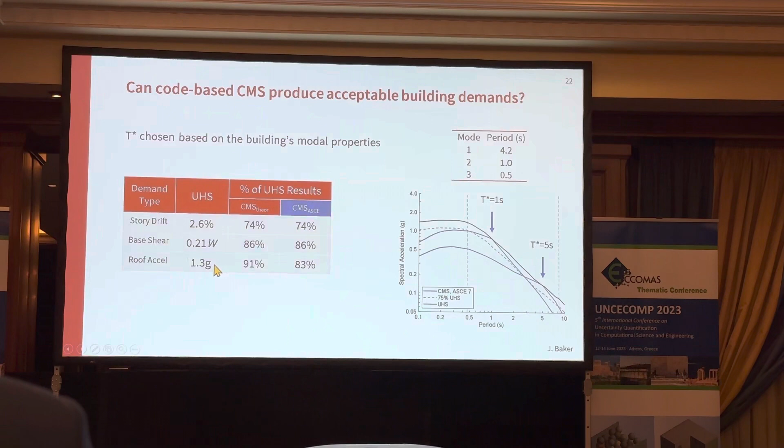And the CMS theoretical, so if we did 17 sets of analyses and took the biggest of these demand parameters, we get the following, and they're just plotted as percentages, so you don't have to compare units to units. So the story drifts are only 74% of the uniform hazard spectrum story drifts, right? Because we're not hitting all the modes simultaneously with that uniform hazard spectrum, it's reduced. The base shears are reduced a little more than 10%, compared to that 10% number I told you about earlier. And the roof accelerations are reduced less, 90% of the uniform hazard spectrum.

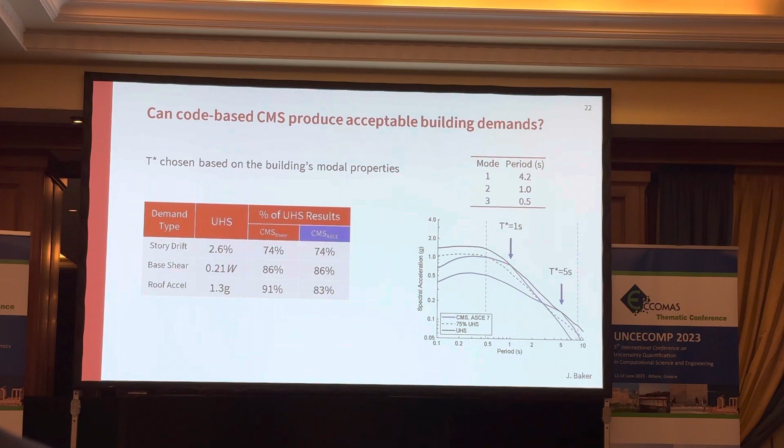The ASCE 7 procedure, that was only the 2 spectra that were slightly broadened. Same thing, we took the max of the 2, and we were pretty spot on with the story drifts and base shears. The roof accelerations we underestimated slightly. Interestingly, we struggled with that one for a bit. At first glance, I was like, oh shoot, we've got a problem.

But what's going on is that ASCE 7 only makes us consider down to 0.5 seconds with our conditioning periods. And so you see all of our spectra are quite a bit lower than the uniform hazard spectrum at very short periods, which is actually what's driving these peak floor accelerations. So it's not really a conditional mean spectrum issue, it's really an issue about the period range that we have to consider. That said, floor acceleration is not typically a critical design parameter in these buildings at least, so we noted it and moved on. It's not really fundamental to the conditional mean spectrum as much as this broader issue of period range.

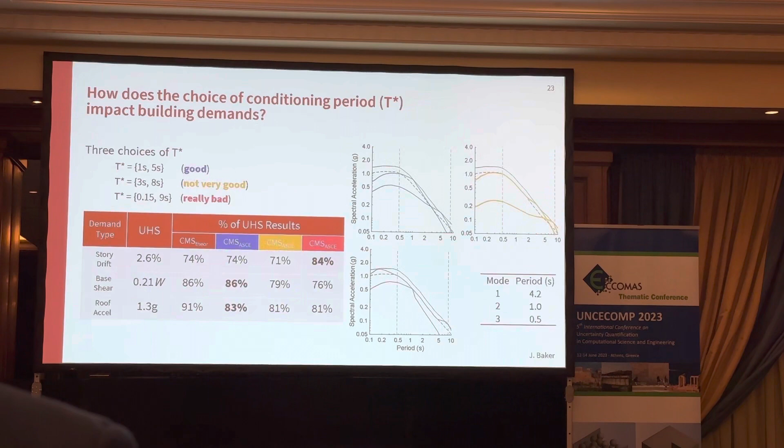Okay. Then what we did is we said, well, good practice with the CMS seems to be working pretty well. What if somebody was bad, right? What if somebody was not doing a very good job with this, which we have to worry about in a code procedure. Although these tall buildings are typically peer reviewed, you don't want to rely on the peer reviewers to catch everything. So we said, instead of these 1 second and 5 second conditioning periods, what if we took conditioning periods of 3 seconds and 8 seconds?

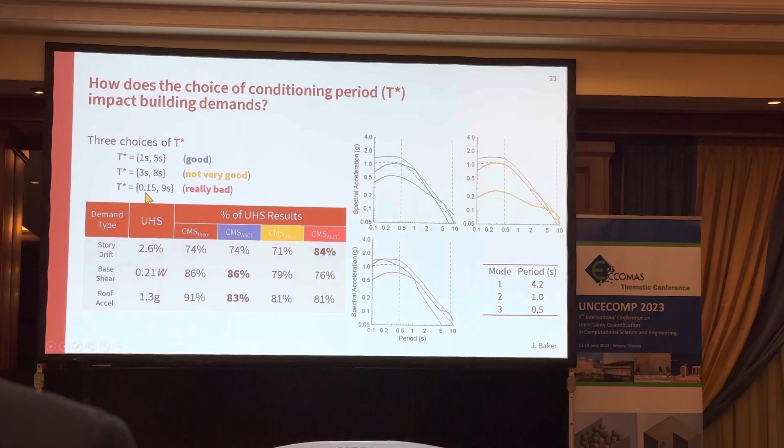So not very good, because it's separated from the modal periods of the structure. Or what if we went as crazy as we could and said 0.15 seconds, way out in short periods, and the longest period we could get to is 9 seconds. So I characterize that as a terrible choice of conditioning periods, because you're loading very far away from where the dynamics of the structure are. But nonetheless, it might be code compliant, and so what happens in that case? The spectra themselves are plotted over on the right.

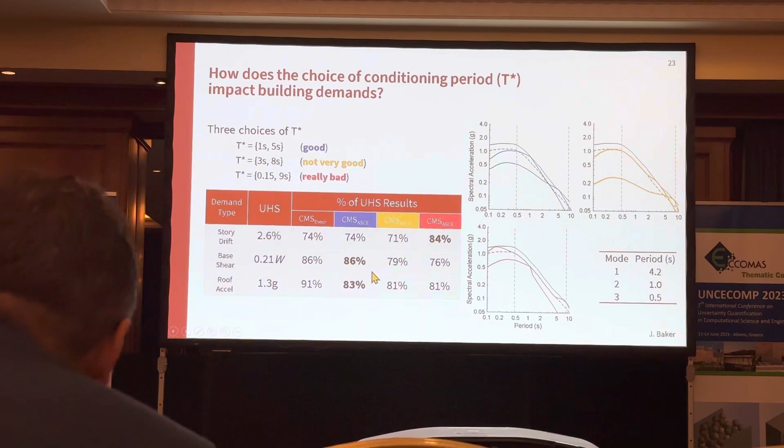So we expand out the table here a little bit with some more ASCE7 rows. And this not very good procedure, we're a little bit low in terms of the base shear. The roof acceleration is kind of compatible. I'm comparing the two rows of CMS in the middle. And then interestingly, this very bad choice, we end up getting a little bit bigger story drifts than the other cases, but the base shears and roof accelerations are okay.

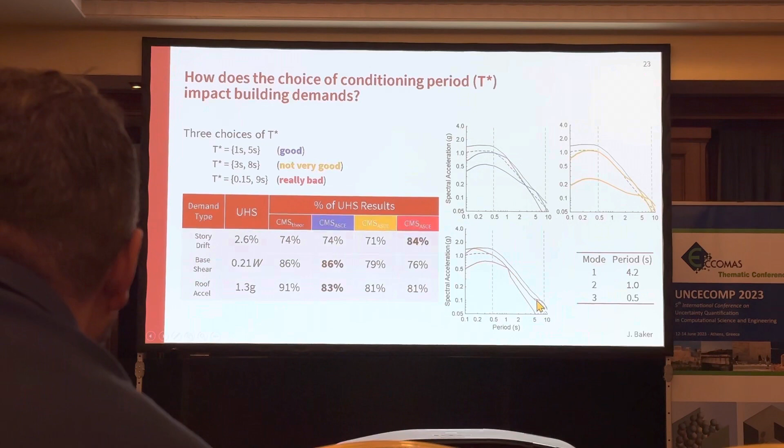And what's helping us here is that 75% floor. So this really bad case, even though we conditioned out at 9 seconds, I got my cursor there showing, we have to keep the amplitudes pretty high from like 2 to 5 seconds where we're actually exciting a kind of elastic response. And so it turns out we've got enough amplitude here to excite an elastic response. And then when the building is softening and being nonlinear, we're still exciting it pretty good. So we got a decent drift out of it. And the other response parameters are pretty equivalent.

So I think this floor of 75% is a pretty reasonable way to ensure that we're not going to miss some key loading condition in terms of the frequencies of excitation. And so we ended up walking out of this, at least for this structure, saying the procedure seems reasonably robust, with ongoing testing for some other classes of structures.

Okay, so to start wrapping up, I want to leave you with a few messages. So first of all, this conditional mean spectrum. I hope I gave you a reasonable overview, if you hadn't seen that before, of an interesting concept for how to characterize these ground motions. In the US, where I've worked mostly, but in Turkey and Switzerland and some other places I've seen internationally, this procedure's gained quite a bit of popularity.

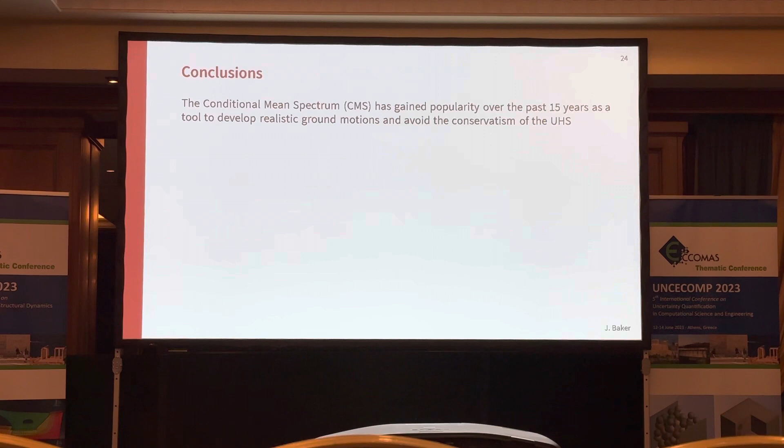The analysts who've got a very complex system, and they're willing to put in some time doing analysis, but they've got very expensive choices if they've got an over-designed condition, or maybe an analyst who's checking an existing structure that's on the border between being acceptable or not, according to some standard, doing a little bit of extra analysis work to separate out and not have a single ground motion with high amplitudes at all periods. It's really been appealing in some of those cases.

I should note, in Western US practice, dynamic analysis of buildings is probably less than 1% of buildings. This conditional mean spectrum is less than all of those 1%, so this is still very much a niche topic. But in those particular cases, for some pretty high importance buildings sometimes, it's gotten to be a pretty popular procedure. And I hope you got some insights today out of why that is and what the concept is.

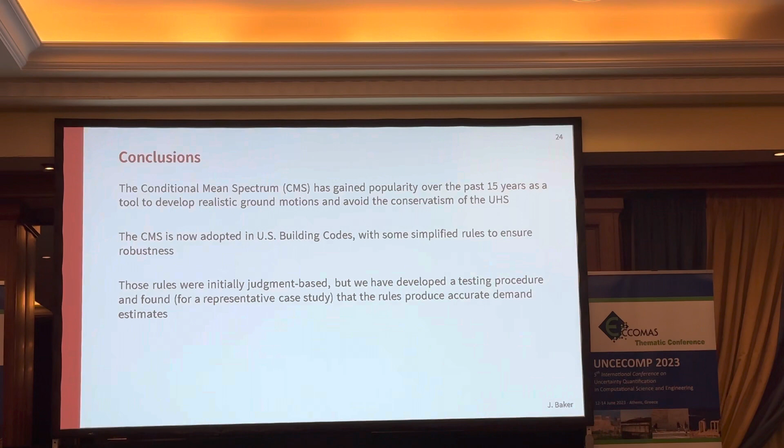I mentioned since 2016, this has been a part of the US building codes. And there are some simplified rules in there to ensure the robustness, but not create an excessive amount of work. And so hopefully that's interesting for some of you thinking about code provisions or assessment procedures. We didn't have a full set of data to make the initial code recommendations based on, but in the years since we've come back in and I showed you a little bit of how we're thinking about doing that checking.

For that representative case study, that's probably the most common building type, these 40-story or so tall buildings, it seems to be working pretty well based on that data that I showed you, and I think we have qualitative reasons to expect that it should work reasonably well. But we also try to lay out that procedure pretty carefully so that we can have follow-on studies with other cases and try to build further confidence.

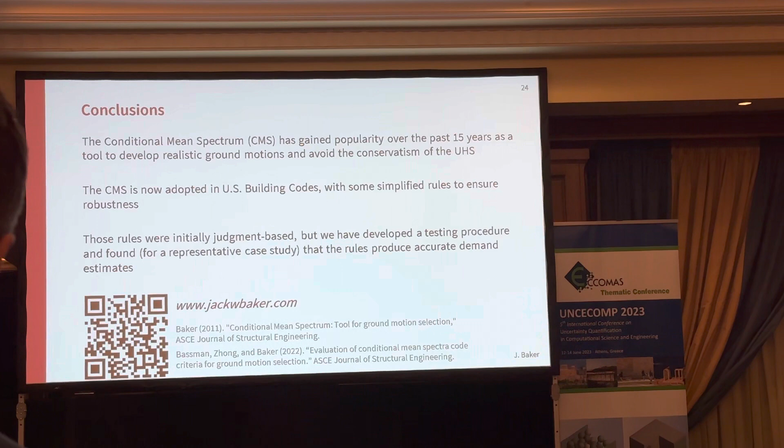Okay. Finally, I'll point you to a website, and there's a QR code to the same website. And I've got citations to the papers I drew most heavily from today. So if you're interested in digging in a little bit more on the theory here, we've got more documentation there. We'd love to have you head over and take a look at it. There's also some software tools to help with these conditional mean spectrum calculations and even some ground motion selection algorithms to try to ease your workload. So these aren't things you have to implement from scratch. Most everything is done for you. At that point, I'll close.